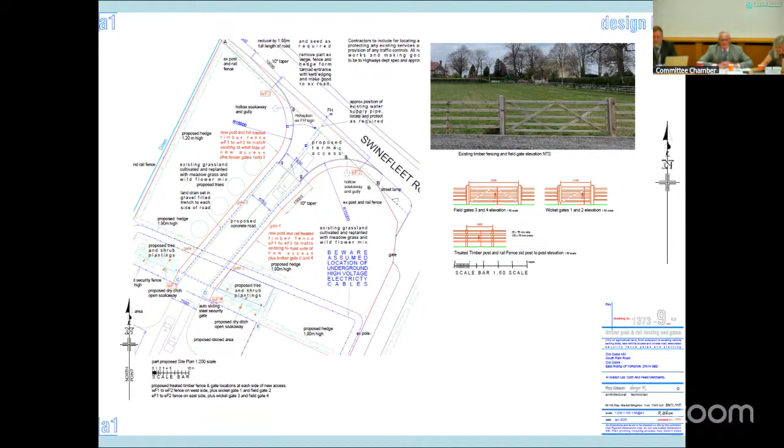Yes, thank you, Chair, and thank you to councillors. Waltons are a long-established family firm and local employer of more than 20 people and operate many heavy vehicles.

This lorry park application is welcomed, as at present they have to use a narrow track to gain access and exit their work site, which is also the same access to South Park, causing a build-up of traffic and a potential hazard for pedestrians also accessing and exiting South Park. Reversing their articulated vehicles into their present workshop causes safety concerns, and this application will resolve this issue.

Over the years, as the park and Waltons have become busier, this has caused problems with vehicles and pedestrians entering the park. Plus, the exit from the site is on a blind bend leading from Swinefleet Road into the South Park entrance. This application is for private entrance for HGVs only and will serve to improve access to South Park in terms of safety issues.

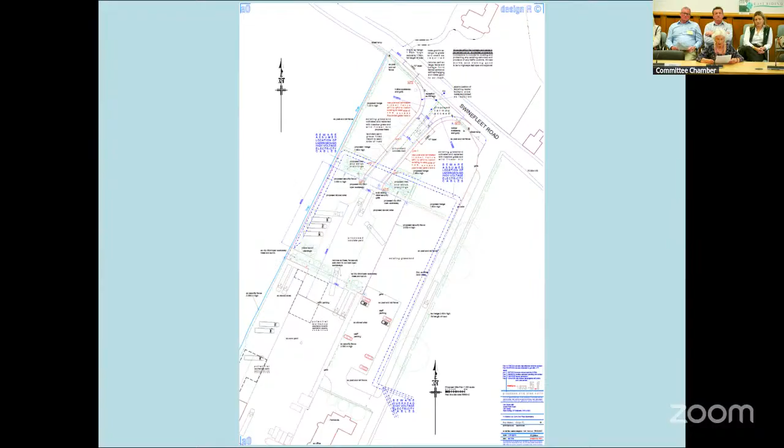The application supports policy S4, which is supporting development and maintaining vibrancy in villages and the countryside. Policy EC1, encouraging growth for the East Riding economy. Part of this policy, Section D, supports development of an appropriate scale to create a new vehicle access and parking facilities for articulated vehicles. Thank you, Chair.

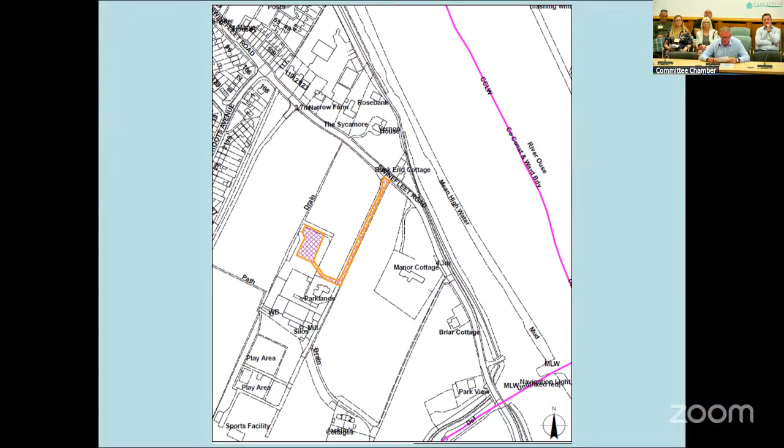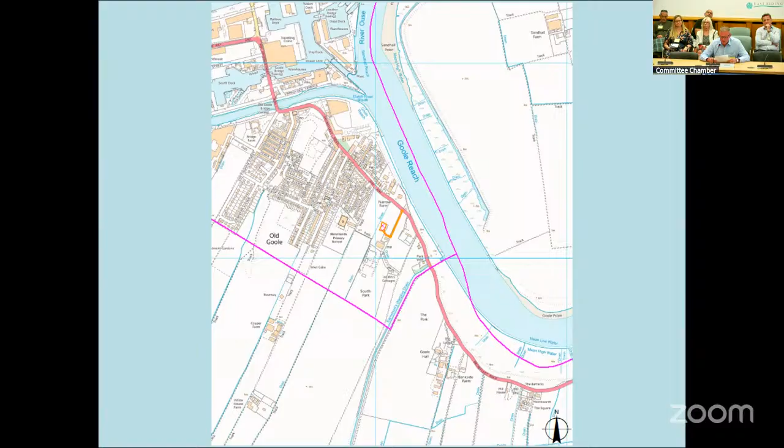If the proposal was a less vulnerable industrial building within the rapid inundation zone and an extension to an existing industrial building that had a maximum external footprint of 250 square metres, this would be permitted. This proposal is detached and has a maximum external footprint of 312 square metres, which is 62 square metres larger. There does not appear to be any logical reasoning as to why a restriction of this magnitude should be applied to a detached industrial building on an established site.

The gov.uk flood risk summary for Old Goole states the risk of flooding from rivers or sea is very low to low with intact defences. The proposal will not increase flood risk on site or the surrounding areas, and in the event of an emergency evacuation, our own early warning systems will be activated.

The proposed building will not be used for habitable purposes, will not be occupied overnight, will be used as an industrial workshop with 3 to 4 staff working day shifts, has a small external footprint, is sited near a place of elevated safety. We are a local business generally employing local people.

48 of us live in the Goole area. 11 of these live in Old Goole, so they either walk or bike to work. We are trying to expand, which would allow further employment opportunities. Our current vehicle workshop was built approximately 50 years ago when Hugh Walton had 2 lorries and 1 part-time mechanic. It still has the same footprint and entrance off South Park Road.

We now have a total of 30 vehicles plus 16 trailers, all requiring regular maintenance and repairs on site by our own qualified mechanics, but this is not always possible due to workshop capacity. Currently, we cannot close the workshop doors with a unit and trailer over the pit due to the length of the vehicle. In winter, this makes working conditions very cold.

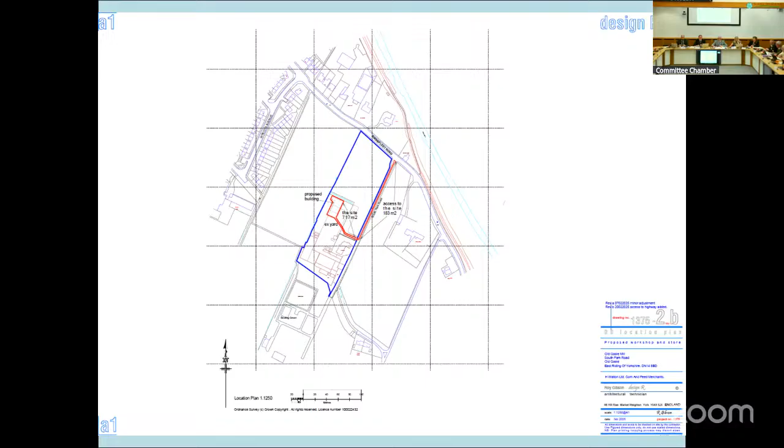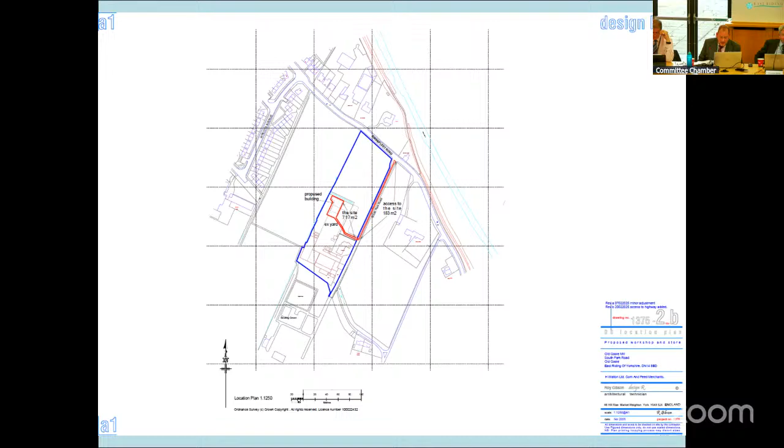Thank you, Mr. Chair. I think this gives us an excellent opportunity to see where investment's being made in a local business that's been there for some substantial time. And it looks like they're taking investment there to make that sustainable for the future. So with the examples of the safety systems and alarm put in place, I think we would be very foolish to do anything other than approve this application. It seems a very sound application.

Thank you, Councillor Coltish. Thank you, Chairman. I don't think there was a proposal, so I agree with that, and I'll propose approval for the reason... Did you propose? Sorry, yeah, I will propose it. I'll use the word approval. Thank you, Mr. Chairman. If that's a formal proposal for approval, I'll second that, Mr. Chairman.

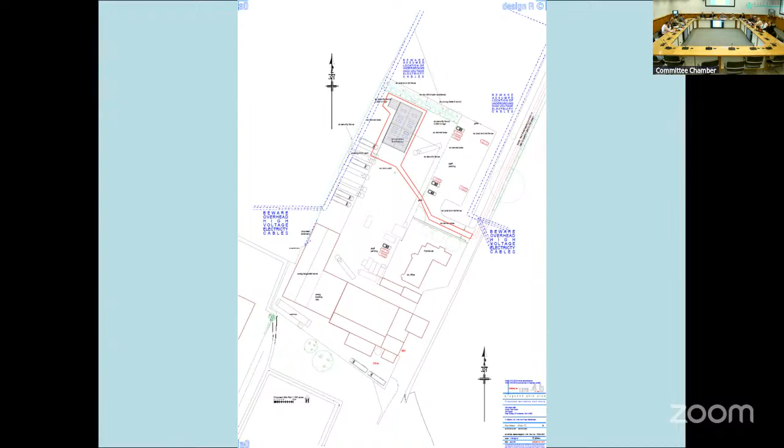Councillor Wilkinson, you wanted to say something? Sorry, I was just going to confirm with officers because you went through a list. The opening times would presumably match the current opening times. We've got no concerns about operating hours, no reason to restrict them. There's no residential properties nearby. We don't think there's any harm as a result of this new building, so we don't think it's reasonable or necessary to do that. Thank you, I just wanted to confirm we're okay with that.

Councillor Coltish, you wanted to say something. Thank you, Mr Chairman. As seconder, I agree with all of those conditions, but I'd just like to add, for legal's purpose, the last sentence in 6.4.1 says basically that there's limited benefits and significant flood risk. In my view, the officers have got that the other way round. I think it's significant benefits and a limited flood risk.

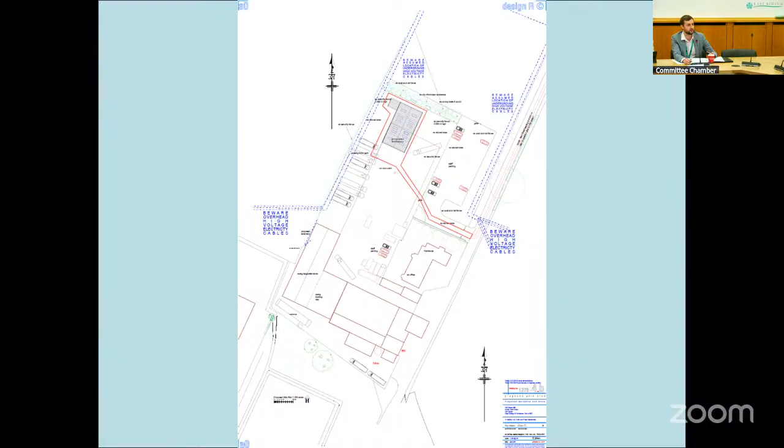Any other councillors want to say? Right, well, we've had a proposal from Councillor Needham, seconded by Councillor Coltish, for approval with the conditions set out and the conditions that Councillor Needham is happy with on his proposal. So we'll go to the vote. All those in favour of approval of this application?

1, 2, 3, 4, 5, 6, 7, 8, 9, 10, 11. Unanimous. Right, well, that application has been approved, Mr Walton, also along with the Lorry Park agenda item number 5, but they've been set out with the approvals put there by the officers that you have to comply with. But thank you very much indeed. Thank you.

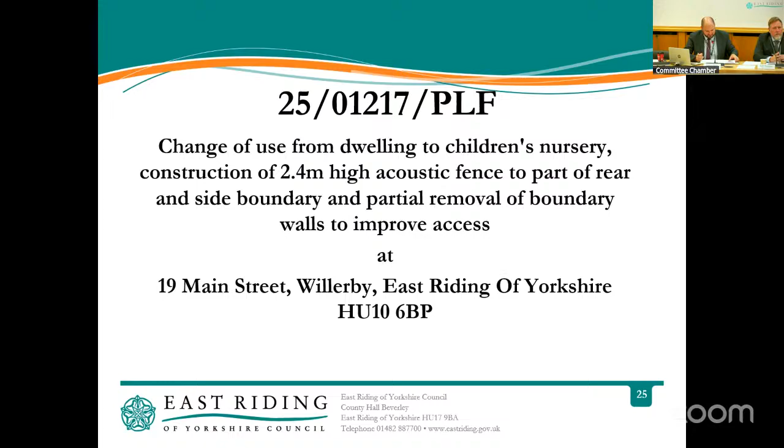Thank you, Chairman. This is an application for planning permission for the change of use from a dwelling to a children's nursery, the construction of a 2.4 metre high acoustic fence to part of the rear and side boundary, and the partial removal of boundary walls to improve access at 19 Main Street in Willerby. The officer recommendation is approval, and I have one update for you, Mr Chairman. Since the report for the application was printed, we've received 2 further objections from the resident of number 1 Apple Tree Mews.

I can summarise the points raised for you as follows.

Apple Tree Mews is a shared residential driveway and subject to easements, and using it for commercial or business use could be problematic. Permission will be required from all parties involved, which will not be given. It could be considered a breach of the shared access agreement, which will negatively impact other residents using the driveway. Legal action could be taken if use is deemed a nuisance or a breach of the access agreement.

The deed document for number 1 Apple Tree Mews states that a full and free right of way at all times is required for all purposes over the road edged in blue. The blue edging is for the whole of Apple Tree Mews from Main Street to the very top.

The neighbour considers the acoustic fence still falls short near number 2 Apple Tree Mews, which could mean it's ineffective. They have great concerns over the volume of traffic at the bottom of the driveway, and over the increase in traffic exiting onto Main Street, which could cause an accident. If a child ran onto the road, it could be very serious.

This type of business they consider should be located in a quiet area, not on a busy Main Street. A business generally cannot use a residential in and out driveway as its designated exit. Businesses should use their own designated entrance and exit points to avoid legal issues. This should also avoid conflict on the residential driveway, and they consider that shared business and residential accesses would clearly be at odds with each other.

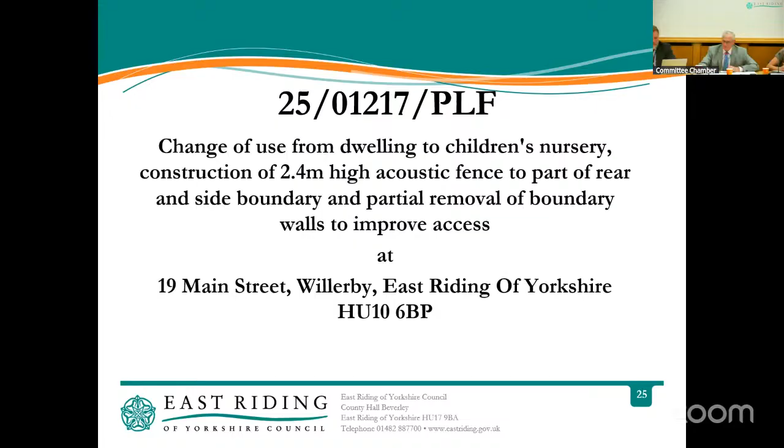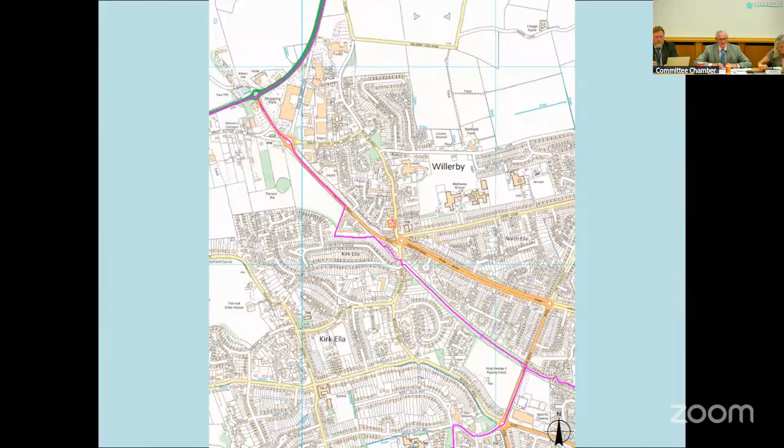Good afternoon. I'm speaking on behalf of the surrounding residents to strongly oppose the proposal to convert a 3-bedroom home into a day nursery. Although the area has some retail and commercial businesses, it is largely a residential area, and while the Highways report deems the proposal acceptable, we feel it overlooks some issues.

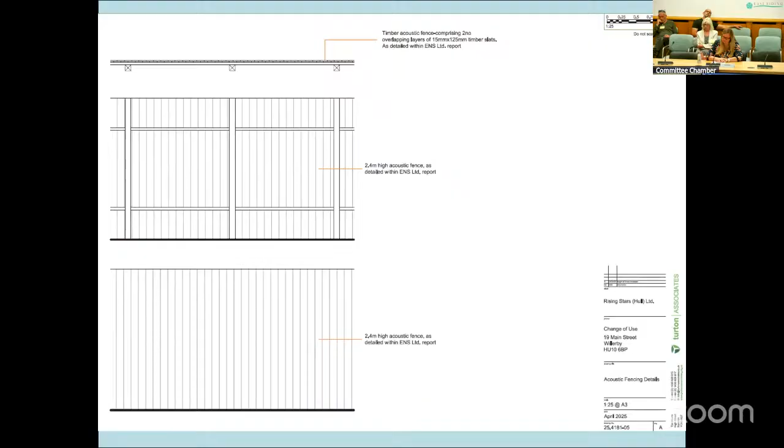The nursery's planned in access is adjacent to Crescent Court. The out access is onto Apple Tree Mews, our only access in and out of our home, which is a private block paved driveway meant for just 3 homes. Using it for vehicles and foot traffic created by dropping off and collecting 44 children plus staff and visitors would compromise our right of way and create daily conflict.

Highways also suggest 2-way traffic would be achieved by moving part of a wall of 19 Main Street where it joins Apple Tree Mews. But in reality, the bend of Apple Tree Mews and nearby parking on Main Street makes this impractical, especially given the plan shows a very large overgrown tree to remain. Main Street is obviously busy at certain times of day already with school traffic for nearby primary and secondary schools.

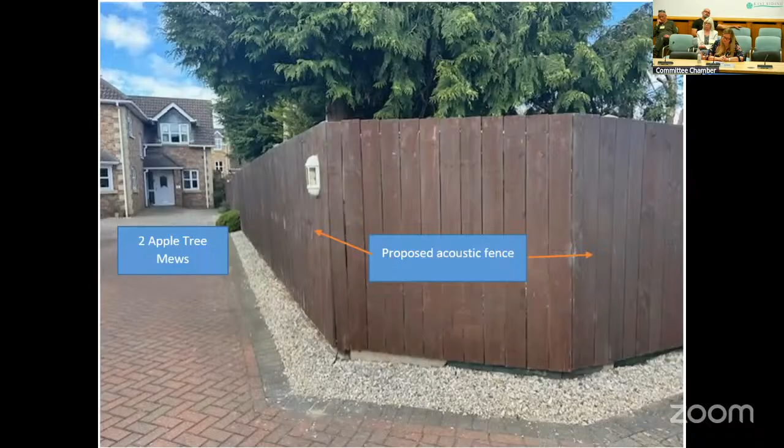Noise is another major concern for all of us. The nursery includes a free-flowing outdoor play area, yet the proposed acoustic fence only covers 1 of the 5 properties directly affected. It excludes most of 2 Apple Tree Mews and all 3 Crescent Court apartments. Our bedroom, study and kitchen face onto the nursery site, and the noise will impact directly onto our living conditions.

The pre-planning inquiry implies that local residents' gardens are facing away from the nursery site, but in truth, the garden of 1 Apple Tree Mews wraps around the property with the patio near the nursery, and the courtyard for Crescent Court, where residents sit out, is to the side of the proposed nursery garden. Apple Tree Mews homes both have windows that directly overlook the nursery garden.

Residents on Oakland Drive, whose homes sit at a higher elevated position, have also expressed concerns about the sound travelling up to them. Part of the reason for not continuing a fence appears to be an outbuilding put by the previous owner that isn't even safe to be near a nursery.

Photos are available online under public comments of that construction. Finally, I'd like to remind the committee that a previous application to build two homes on this same site was refused by this very committee in 2024 due to the constrained nature of the site and the awkward arrangement of the private drive of Apple Tree Mews, and noted that the intensification of its use would have an adverse impact. Yet now a nursery for 44 children plus staff and visitors is being considered.

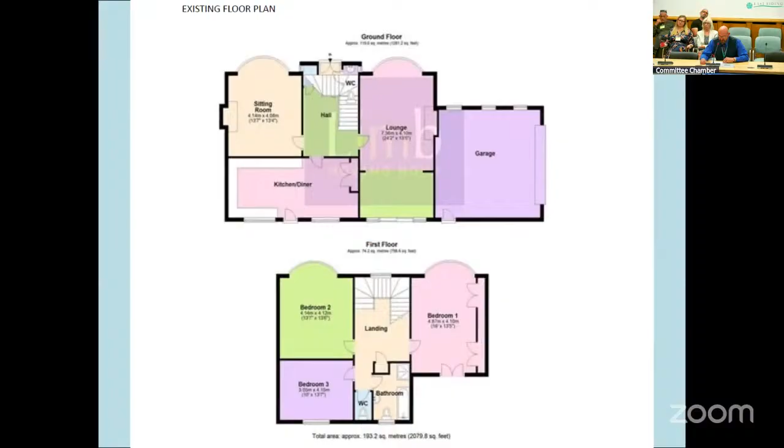Main Street is a very busy road, and parents entering and leaving will need to contend with very heavy traffic, on what is a very busy road with a tight entrance and even tighter exit. The proposed plan shows a one-way system in and out of the nursery. However, the proposed nursery exit via Apple Tree Mews is also the only entrance for the residents to Apple Tree Mews. So therefore, it's not a one-way system. There's traffic coming in and out in the very tight exit.

Apple Tree Mews is narrow and has a bend right on the exit where the proposed nursery exits, which is already dangerous. But not only that, it's literally a car's length away from Main Street.

Not long back, an application was submitted on this very same site for 2 dwellings, and that was turned down on highways and design grounds. I submit, if the previous proposal for just 2 dwellings was not suitable and refused, how can this proposal, which is significantly bigger, be acceptable? Whilst much needed, I feel a day nursery at this very small site is too much and too big an impact on the existing residents, as well as a very busy road. I urge this committee to refuse this application today, or at the very least, if you're mindful to consider it, please consider a site visit before making a decision.

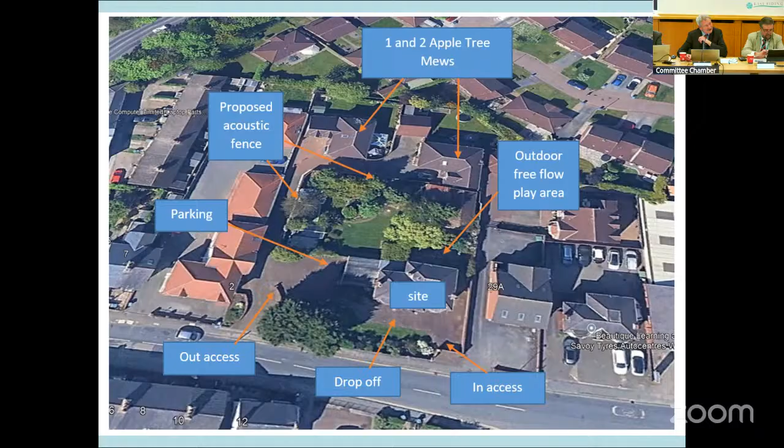Something which I don't suppose is within our remit is the internal arrangements. I'm just a little bit concerned about toilet facilities, because when you've got 20 babies and another 24 happy little children running around, we appear to have a WC upstairs and a bathroom downstairs with the WC, and I'm concerned that might not actually be sufficient, but I'm not sure if that's within our remit as a planning committee. Anthony is shaking his head at me sadly, so that's obviously not, so I've wasted my time burbling about that. But I would suggest, can we have an informative to ensure that full sanitary arrangements are permissible within the area?

Through you, Mr. Chairman, as a planning authority, we'll deal with the use of land and buildings. There are other regulatory systems in place, other legislation to deal with facilities at a day nursery and regulations they have to comply with, and the applicant running an existing nursery setting in Willerby will be fully aware of their requirements in terms of the regulations they need to provide for toilet facilities and waste disposal, etc.

I would hope so. Councillor Coltridge has just muttered at me about nappy changing as well, which of course is very appropriate. But to sum up, Chairman, whilst I do appreciate the concerns about traffic, I think they have been mitigated. With concerns about the suitability of the building itself, I'm happy with that. And I'm afraid I'm verging very near to proposing approval. In fact, I think I shall. I propose approval, Chairman.

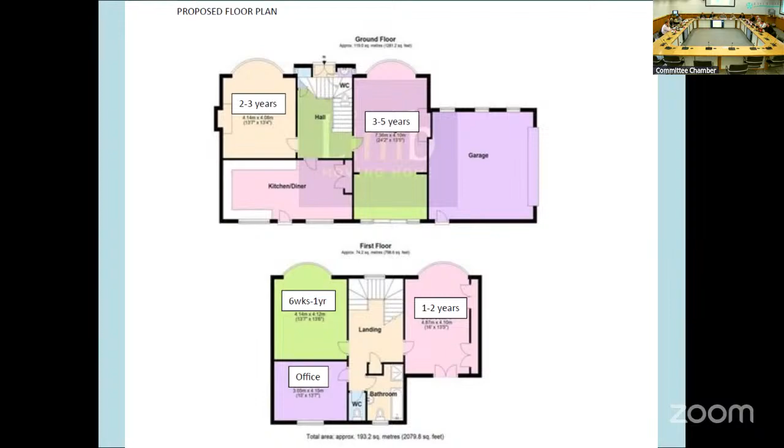Thank you, Chair. I remember this application last year, albeit I was missing for the second meeting and the site visit, unfortunately. But I remember visiting the area, and I know this street quite well, not being that far away from where I live.

So it is. The issues we had last year, from the minutes, resolved that the application be refused on the grounds of the constrained nature of the site and awkward arrangement of the private drive and the parking area to the rear of the plot, and about two dwellings. If I'm remembering rightly, I haven't actually gone and looked at the previous application, but I think that was for two houses being built in the garden. Those of you might remember that, and therefore the full access was going down Apple Tree Mews.

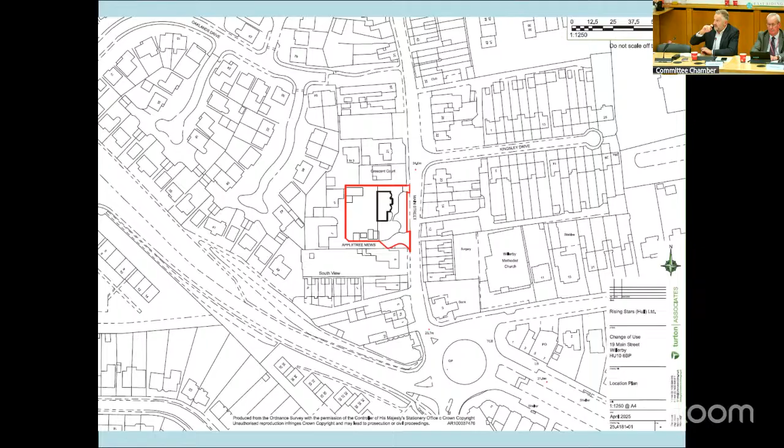Where this is just driving in at the top, and there's been concern about the two-way traffic. That is pretty short distance that there's going to be two-way traffic on this. The entrance is quite wide, and obviously, while it is a private drive, this property has clearly got permitted access over there, based on the pictures that we've got on the plans and everything.

So I'm not quite sure I could support a refusal on that basis. It is busy around there. If you ever try and go around there and you can't find a parking space, it is a bit of a nightmare. Whatever little road is dead opposite, don't go and try and find a parking space down there, because it's a nightmare. You'll probably struggle to turn around and come out.

But it does feel like all the right boxes have been ticked. I'm not quite sure I'm necessarily ready to second the motion, the proposal by Councillor Whittle. But I think two houses were going to be built on that back garden, and loads more. This seems like a lot better scheme than what we saw last year. Something's got to happen with this house. It's obviously been - I'm thinking it's empty and a bit dilapidated for a while or whatever. Apologies if it's not to any owner, but I think that's where it's at. I'm struggling to find anything wrong with it really.

Thank you, Mr. Chairman. I thought I'd just clarify the history for the site. So the scheme we're referring to last year, if you can see the bit of the building that sticks down southwards, that's an attached garage. The previous scheme was to demolish that garage and then effectively cut the site in half and build two properties in line with number 19 in the side garden. Their access and parking was down Apple Tree Mews, with a shared parking court at the back.

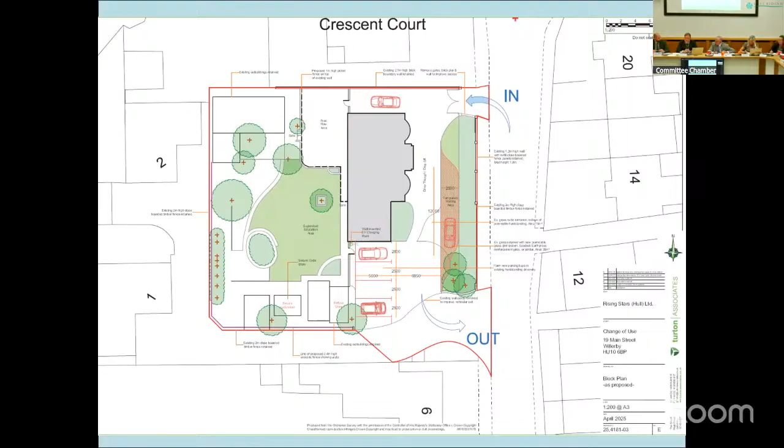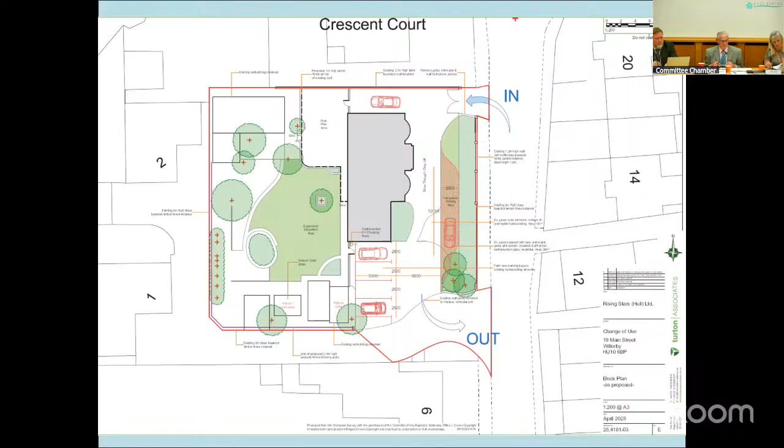Okay, thank you. Thank you, Councillor Boville. Right, well, we've had a proposal from Councillor Whittle for approval, seconded by Councillor Harrison. I think we've all had a pretty good discussion about the merits or the objections as such. We'll move straight to the vote.

So we'll say, all those in favour of approval with officer's recommendation, approval with conditions set out in the report: 1, 2, 3, 4, 5, 6, 7, 8, 9, 10. Those against? One, Mr. Bovill.

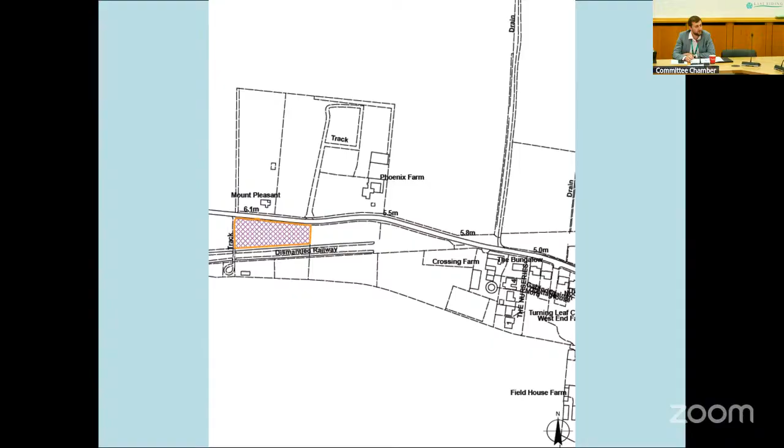We'll have no speakers on this application, so I'll move straight to the council. Anybody from Councillor Coltish? Thank you, Mr. Chairman. I know Asselby fairly well, being local to it. It's one of those places members may not even know exists unless you've had reason to go there, and there's very few reasons to unless you live there. It's a very typical East Riding rural village, and I think it's appropriate to have a stable housing horses in a very typical rural setting. So I'll propose approval in line with officers' recommendations.

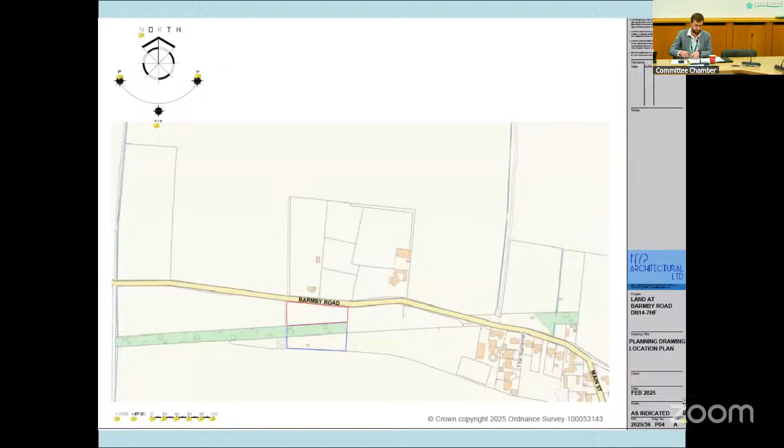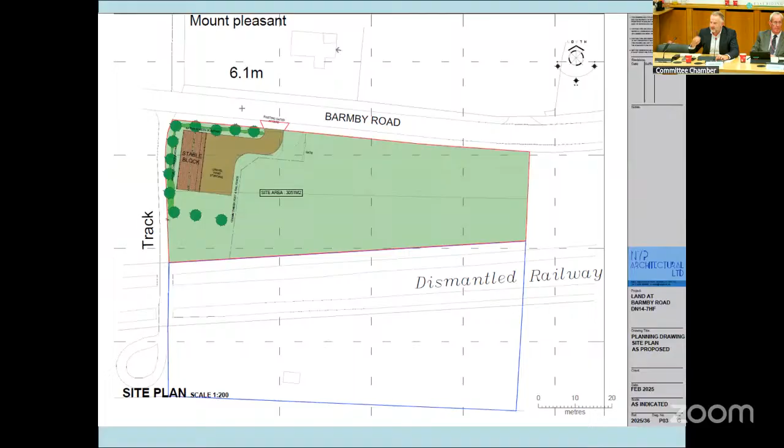Thank you, I think it was Councillor Hopton next. Yeah, I'd like to hear one or two other thoughts before seconding and approval. It does strike me that I'm slightly struggling with the objections - we've got farmland with a stable block being approved on it, which in my world sort of go together. Are we just losing a stable block where I live that's been turned into a shop and a cafe? But this is a new stable block on agricultural land. I'm almost surprised it's here - a lot of these things you can get done under agricultural permissions. So I'm struggling to see why it's here, shall we say.

Councillor Wilkinson was next. Thank you, I think Councillor Hopton actually said what I was going to say, which is I am struggling with the objections. Stables and horses in a farm community, it's away from the village, even though the village is quite small. It says there'll be numerous travels to the site and concerns for highway safety, but they're just going to be looking at horses, and I am struggling with this. I absolutely think the officers are correct in their recommendation for approval, and I can't remember if Councillor Hopton seconded it. I will second it for approval.

Next was Councillor Whittle. Thank you, Chairman. I thought I'd make the most of my time here in the Western Area since I rarely come to speak to you. With this, all you have to do is read through the report. It's a modest stable building that respects the intrinsic character of the area. It's been amended after officer concerns to the gable end facing the highway. Modest proportions would not over-dominate the site without constituting overdevelopment - sympathetic impact. Says it all really, Chairman. I'm more than happy to approve this.

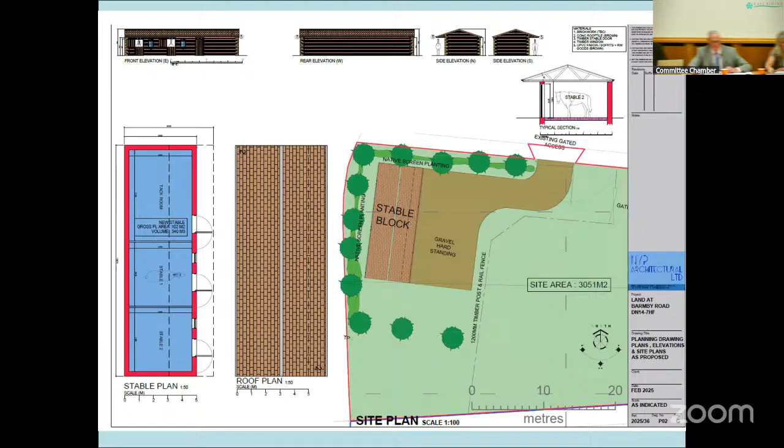Any other councillors wishing to make comments? No? Right, so we've got a proposal for approval from Councillor Coltish, seconded by Councillor Wilkinson. So we'll move to the vote. All those in favour of approval? One, two, three, four, five, six, seven, eight, nine, ten, eleven. Unanimous. Thank you very much. So that application is recommended for approval with the conditions set out in the report. Thank you very much indeed.

Right, councillors, we'll now move on to appeals, of which we have got a few.

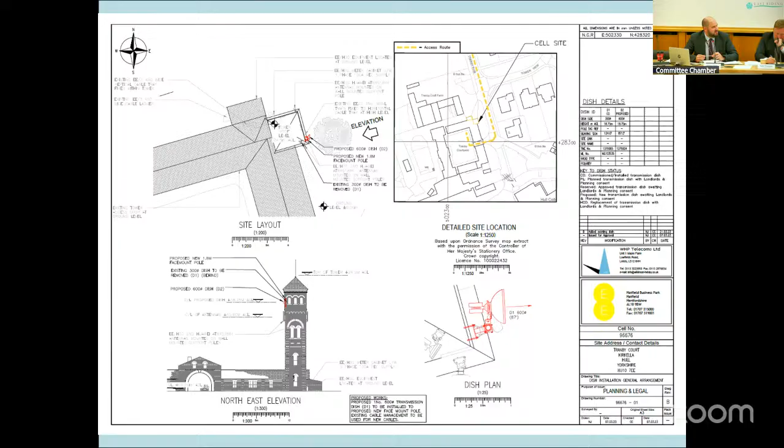Thank you, Chairman. Appeal 8A relates to two appeals, a planning appeal and a listed building consent appeal at Tranby Court, Kirkella. Tranby Court is the school and the associated stable block, which has a water tower attached. The application was to install telecommunications equipment on the listed water tower. We refused the application under officer delegated powers on the basis of the impact on the listed building. There are two elements to the listed building - a stable block with water tower, and the actual listed building which has been converted into the school. We refused it only on the basis of the impact on the water tower. We were successful in defending the appeal. The inspector dismissed the appeal, but also highlighted a concern about the impact on the setting of Tranby Croft, the school building, finding less than substantial harm to the significance of those heritage assets that wasn't outweighed by the limited public benefits of upgrading that telecoms equipment, which could be done in a more sympathetic manner without harming the listed building. So those appeals were successfully dismissed.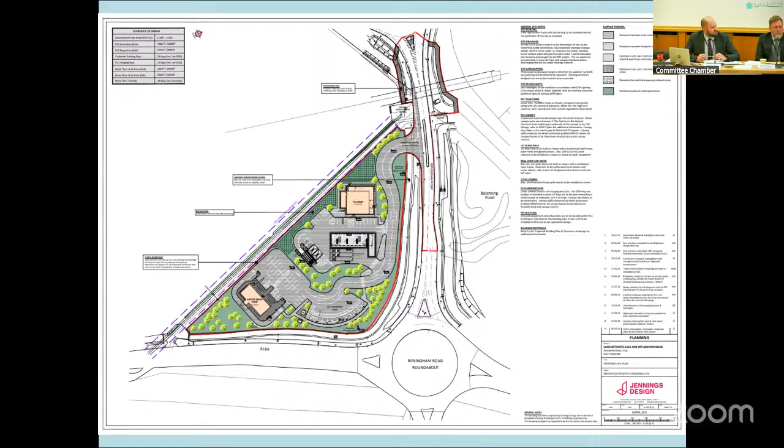Appeal 8B, members will remember this one. This came to the committee and was refused in accordance with officer recommendation. This was for the petrol filling station, drive-through coffee shop and EV charging hub.

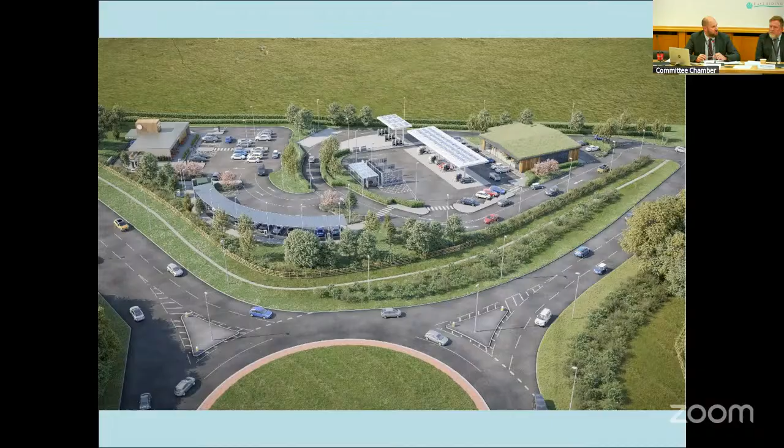You'll remember that the applicant put a lot of emphasis on the benefits of the scheme, and the benefits would be delivered through the EV charging facility. We felt that we acknowledge there would have been a benefit there, but the overall harm to the landscape outweighed that benefit, and we refused the application on landscape grounds only.

We were successful in defending the appeal. The inspector found harm to the character of the landscape. The inspector did a very good job, if you read through the decision notice, of weighing those benefits against the harm, but found that the proposal was not in accordance with the development plan, would not be at an appropriate scale, and would cause harm to the character and appearance of the site and the surrounding landscape, to which they attached significant weight.

So a really good outcome for quite a high profile case that was very difficult to deal with at the time.

You know how with houses and such, we have a thing that says it may be approved where it usually wouldn't, if it's of exceptionally high quality or outstanding design. If, for example, this was a hydrogen filling petrol station, the first of its kind in the region, would it perhaps have been recommended for approval then, based on the fact that it's unique and significantly innovative? The landscape harm, I think, would have been the same, but it might have had a different level of benefit that we would have had to weigh in the balance.

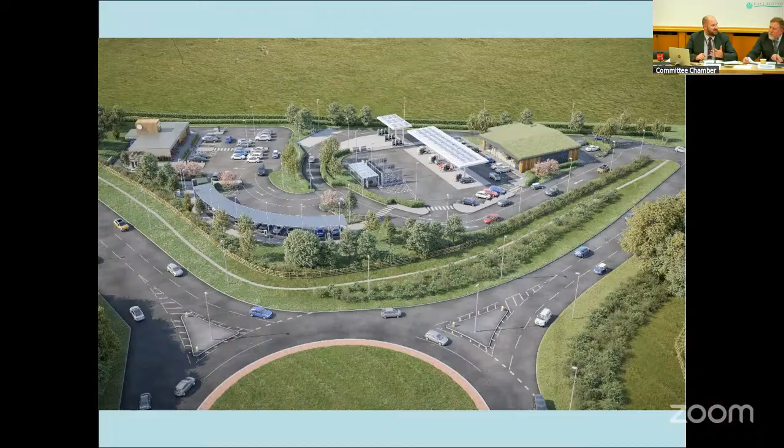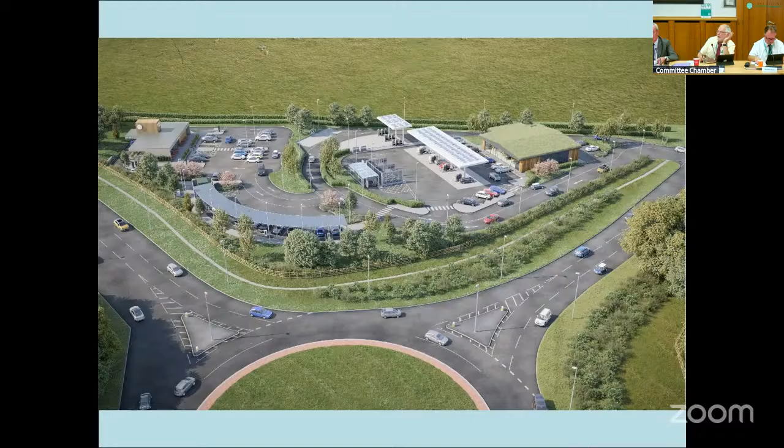So when we started out dealing with the application, there were many issues. There were drainage issues, issues with the public right of way, highway safety concerns, HGV refueling on there, and the tight turn off the road between the two roundabouts, which was specifically put in place to reduce road traffic issues in that area, would have introduced tight turning HGVs, which is an issue. So there's lots of negatives to it at first. It's also duplication, because just further along there was another petrol station with a shop attached to it, so it was unnecessary.

We managed to whittle that down by working with the applicant to get a scheme that was just focused on landscape harm. So we were going into the appeal feeling that it could have gone either way, because it was one issue versus many benefits. But we were successful because it was a highly prominent site.

Councillor Robson's absolutely right. Part of their argument was that this was essential to meet safety and welfare needs of motorists. And you'll know from that area that you travel less than a mile down the road, you've got McDonald's, KFC, two petrol filling stations, one on either side of the road. And most petrol filling stations now are implementing at least a couple of EV chargers, so we're getting applications for those all over. The inspector weighed all that in the balance and found that the harm wasn't outweighed by the benefits - a really good decision.

Just coming back to what you said there, Nick, knowing this area as well as what I do, because it's like a strange little corner that isn't in my ward, but probably should be - if you're coming down the hill, literally, you can't see any buildings at all. It's just countryside. That would have changed this fundamentally.

As Councillor Robson just said, and Anthony as well, you've got every type of shop you could think of, from Waitrose to Poundstretcher to B&M, KFC, McDonald's, and two petrol stations. I still can't believe Highways said it was all right, but there you go. That's Highways for you.

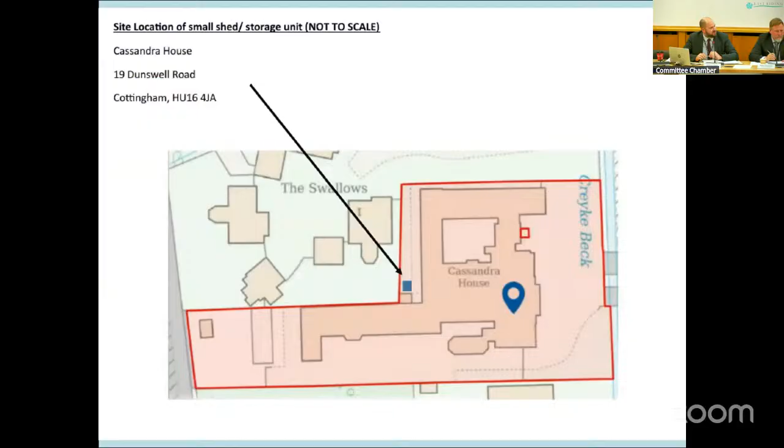8D on page 90. This was a bit of a disappointing one. This was Cassandra House on Dunswell Road in Cottingham. If you know it, it's a residential care home, obviously an important facility for the community.

Without planning permission, they built a little shed, the pale coloured clad one in the yard, to incorporate a number of freezers used to store food for the kitchen. They built that without planning permission, and an enforcement complaint came in.

The height of the building and the fact there was no PD rights on the site meant it needed planning permission. They submitted a retrospective application to retain it, and we received two objections from neighbours about noise disturbance from a fan on the back of the building, attached to cool the freezers.

We refused the application, but not on the basis of the building itself, more about the lack of information about noise. At the time we received the application, we were not accepting new information that would require further reconsultation, so we asked them to go away and resubmit with suitable noise information so we could make a proper assessment for the neighbours.

Rather than do that, they appealed, and the inspector just took the application at face value, saying it's a shed - what they keep in it is irrelevant. They didn't help themselves because they described it as a freezer store; if they'd described it as a shed, what they kept in it probably would have been irrelevant.

It was a bit of a disappointing one. We didn't want to refuse it, but we couldn't go any other way with it, given the neighbour objections and the lack of information. Ultimately the right decision, I think. They've got permission for the building, and if they add things to it needing separate permission or generating noise issues, those complaints can go through to our environmental health team to investigate. So the appeal was allowed, but ultimately I think the right outcome for the nursing home.

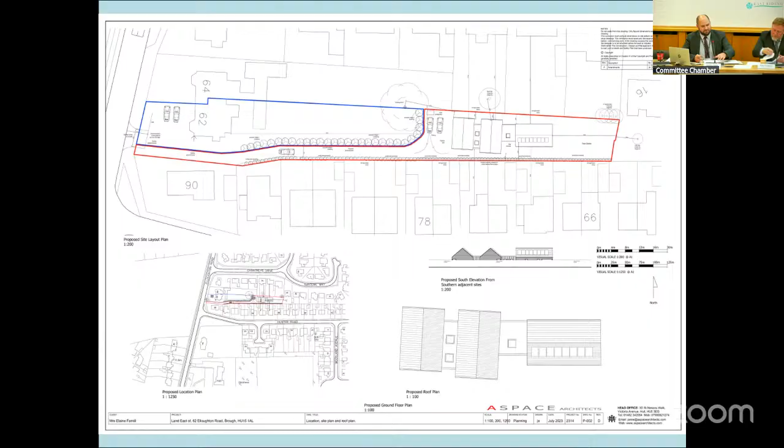Can I just ask, it says there's a separate decision on the costs - have we heard anything from that? I know this one was only in July, so is it too soon?

Yes, the costs appeal was refused, so we weren't being unreasonable - we were being totally... yeah, there was no cost awarded either to ourselves.